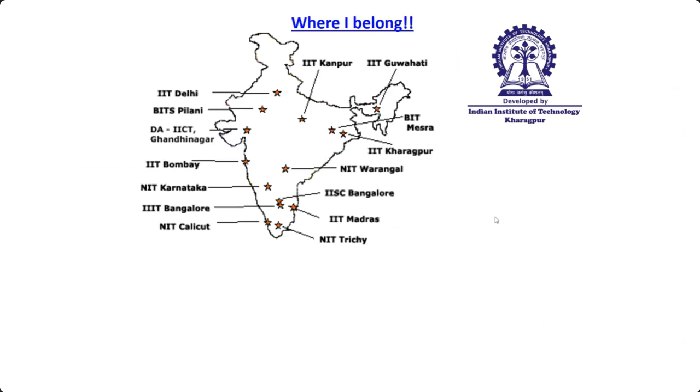Okay, so at the first point, let me just show where I belong. I come from this IIT located at the eastern part of this country, and this is the first IIT for the entire IIT system, established in 1951 by our then Prime Minister, Pandit Jawaharlal Nehru. We have a strong history in the sense that our campus is actually located in a Hijli detention camp. So this was a jail, there is actually still a jail for the freedom fighters of the then dependent India.

And when it was a motto to create a university which can cater to the strength of the country, it has been developed here. We still have the main motto of our institute inscripted here as 'dedicated to the service of the nation.' We strongly believe in that aspect.

Let me just show you the group of students, my entire strength, who have added up to my knowledge base layer by layer. Of course this photo has been taken before the lockdown, so some of the faces have already passed out, and there are some new faces. So whatever I'm going to show today is because of their hard work.

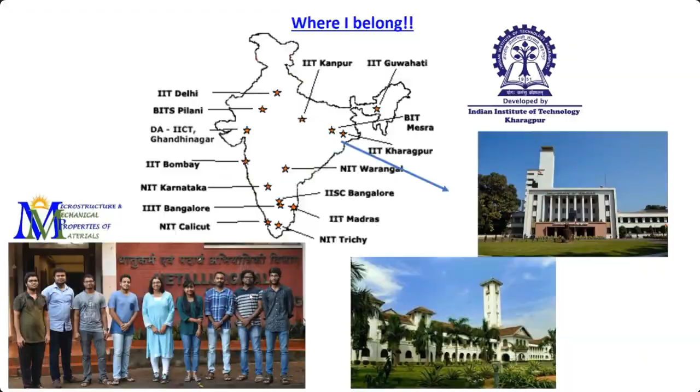The broader research activity is basically to correlate the microstructure and the mechanical properties of materials, and different kinds of materials. We work extensively on nickel-titanium based shape memory alloys that have wonderful properties, on titanium-based intermetallic alloys which are very capable for high temperature applications used in aerospace industries. There are several other kinds of titanium alloys, and of course anything in metallurgy will always stand on steel, so steel forms our main pillar.

So there are several categories of steel that we work on, super alloys as well, both conventionally processed as well as additively manufactured. We extensively study their mechanical properties at the macro scale, doing several kinds of fracture, fatigue, all different kinds of fatigue testing on this, and also at the micro and nano scale.

Okay, I'm getting a message that the connection is interrupted. Am I still audible?

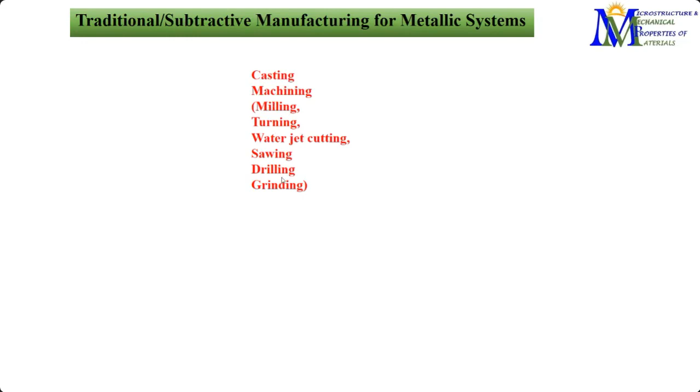When we metallurgists talk about any kind of process systems, we think of several kinds of processing operations on a component, which are inevitable, like casting and different kinds of machining. These are some of the ways by which we try to give the material, a block of material, a particular shape.

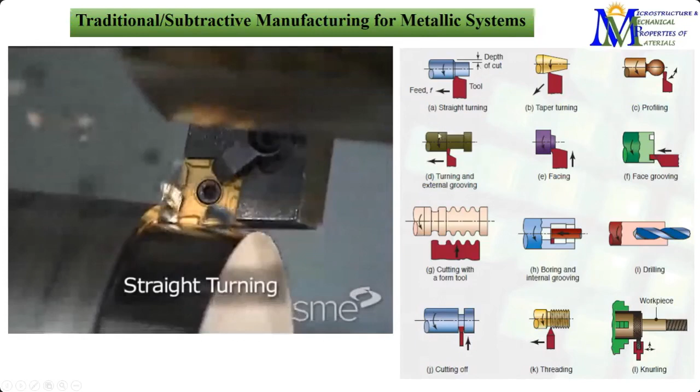We apply several kinds of machining operations like turning. Let me show a video - since there is no sound, I will explain it myself. This is a kind of straight turning where we apply the tool to turn it continuously so that we can give it a particular shape, and in the process you can see a lot of chips coming out.

So this is another way of turning being shown. Several kinds of operations include taper turning, where we can get a taper, something like this. Of course, there is a lot of mechanics behind each of these operations, and I'm sure you might be familiar with them.

What we can see here is that to get a nice shape for the purpose it is meant for, after casting the materials, we have to go through a severe amount of processing to give it the final shape and the required properties that it is meant to have.

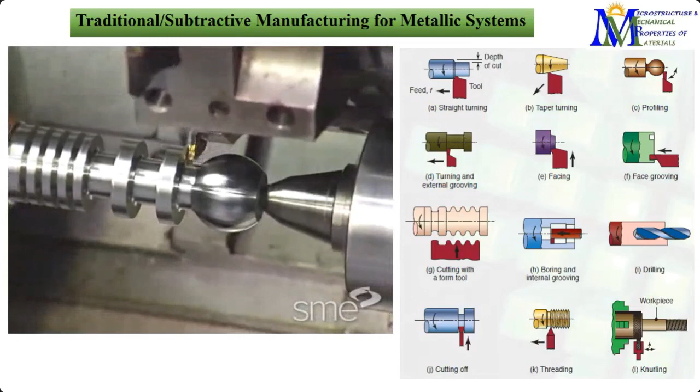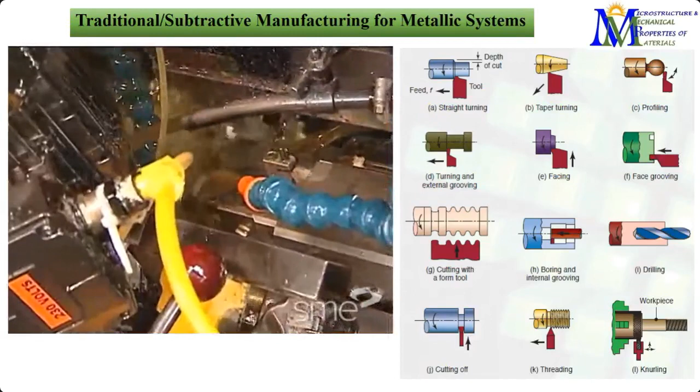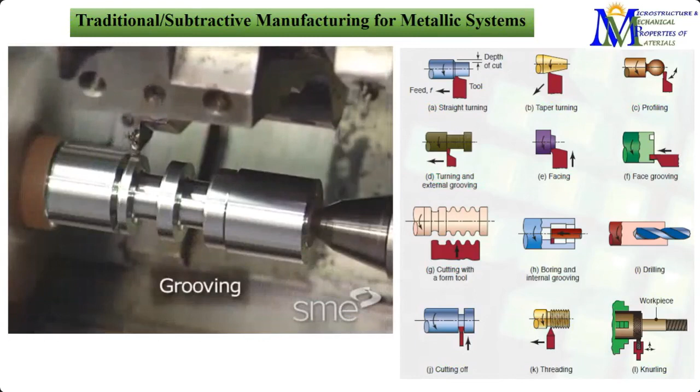So this is a kind of forming operation. And chamfering - this is necessary to give it a 45-degree inclination. And this is grooving; often we need to do internal grooving as well. Threading - you can see the threads very distinctly here.

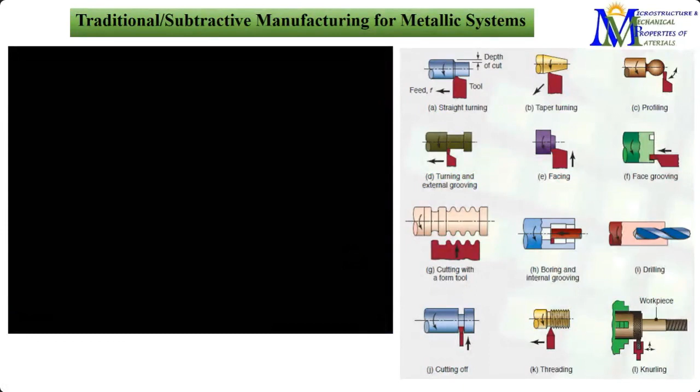So these are the different operations that we need to do. But when we think of that, this is associated with a large number of problems, in the sense that we always thrive for better material, and by better we mean it should have higher strength, hardness, etc.

Higher the strength of the material, the tool should have even more hardness compared to that. And when we are continuously machining, there is a huge amount of tool wear. So there is a lot of studies going on to make the tool material strong enough so that we can work with components of certain materials like super alloys, which are much stronger, and we need such kinds of tools. Wearing of the tool is a huge issue.

There is, of course, undesirable chip formation - you see chips everywhere. We need to do some after-processing to get rid of this chip, and basically this is just a wastage of material. We have to waste more than 50% of the material just to give it the final shape, which is often very challenging considering the entire cost of the component.

So this is how conventional subtractive manufacturing works - we have a block of material to which we give the particular shape that we want, and in turn, as I said, there is a huge amount of material that is just wasted.

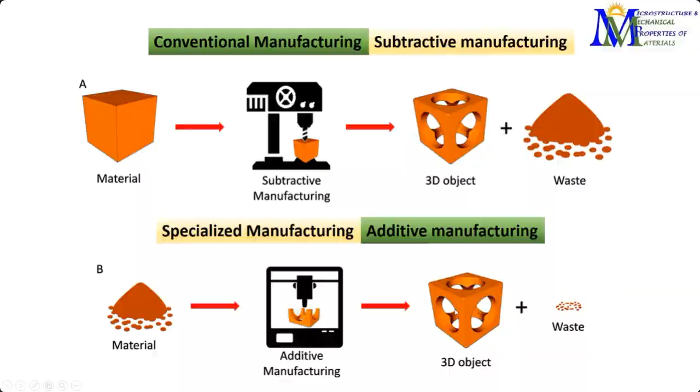Basically, subtractive manufacturing is a top-down approach - we start with the bigger piece and gradually move on to the shape we require based on several kinds of operations. On the other hand, additive manufacturing starts with the powder, so it's a bottom-up approach - we start from the lower level and keep adding layer by layer to finally reach the shape we require.

Okay, my screen has once again gone and I'm getting a message that there is an interruption. Ma'am, it is okay. Okay, fine. Thank you.

So if we give the brief differences between additive manufacturing and subtractive manufacturing: as the name itself suggests, additive goes on by adding layer by layer, whereas subtractive deals with removing from it. We can get complex and customized shapes as necessary. It is said that additive manufacturing can do this in a single step, whereas subtractive manufacturing has limited ability; we are often not able to fabricate very complex shapes just by machining at different levels.

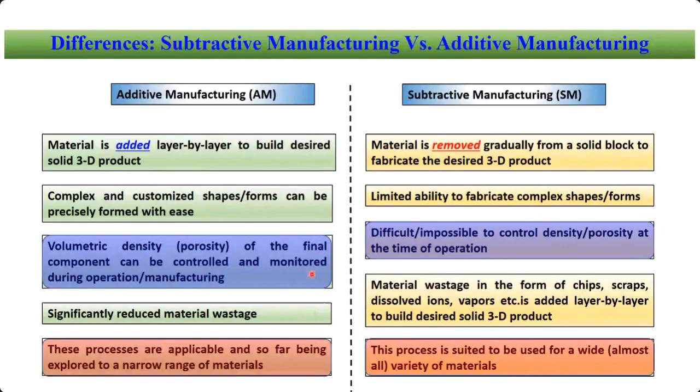Now, moving to additive manufacturing itself, we have already established that additive manufacturing is the future. There are a lot of opportunities and several things that need to be explored. We also need to understand the challenges. Of course there are several advantages, but what are typically the challenges that need to be overcome in additive manufacturing? First, we can get a complicated shape, but it is very challenging to have fine accuracy in every nook and corner.

Often the surface finish is an issue, and we need to ensure a suitable surface finish. Now, thinking from a metallurgist's or mechanic's point of view, for a particular application, say aerospace, we are very much concerned about properties like fatigue, and how the component will behave under cyclic loading. If we are not able to ensure proper surface finish, that will be detrimental for the fatigue performance of the material. So we can have a complicated shape and all the benefits of additive manufacturing, but we can still end up with early failure if we don't ensure this particular aspect.

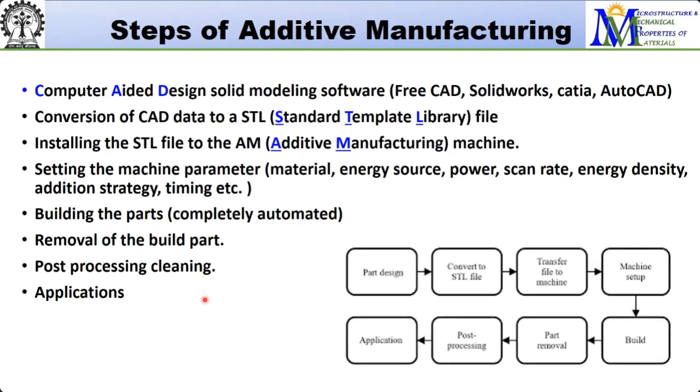Okay, so these are just the flowchart for that. And there are different kinds of additive manufacturing processes. According to the ASTM F42, there are seven different ways.

Out of those, the ones mostly suitable for metallic systems are powder bed fusion or powder feed technology. Amongst powder bed, there are different kinds: electron beam melting, selective laser sintering, selective laser melting, and direct metal laser sintering. Whereas in powder feed, we have LENS, laser engineered net shaping, direct metal deposition, or laser metal deposition. These are the principal operations that we use.

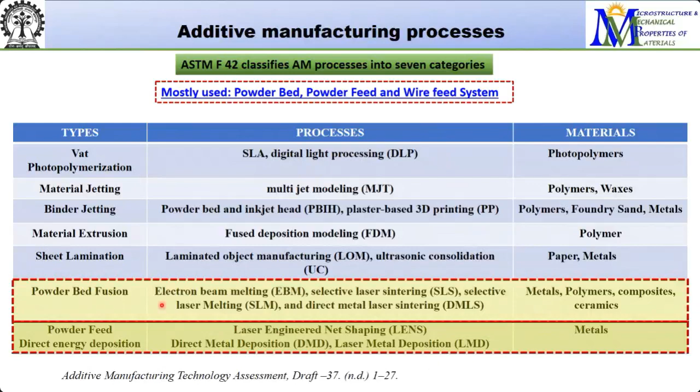So basically we have different kinds of heat sources: laser beam, electron beam, plasma arc, gas metal arc. All different things are used as energy sources, and out of those, laser beam is the one mostly used. Electron beam is also very much used, but laser beam is the most widely used.

As I said, the major two types of additive manufacturing techniques mostly used for metal additive manufacturing are powder bed, where we have a nice bed of powder and the source of energy travels as per the design to get the product. And in direct energy deposition, often called powder feed, we have the energy source and the powder stream acting simultaneously as per the design, and then we get the final product.

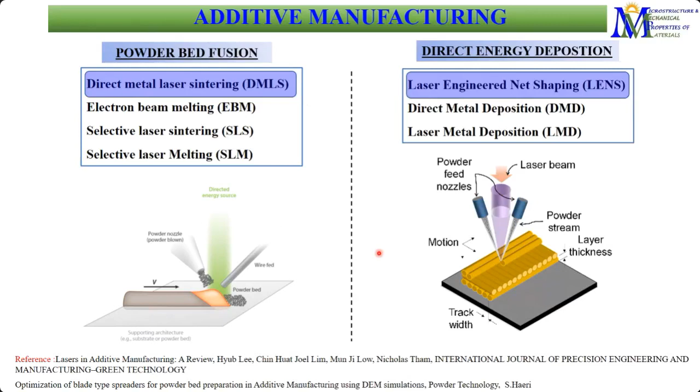So these are the different techniques for powder bed as well as powder feed. I would like to show two different things, one from each category, to show how these are being done. Once again, I'm having a video here.

This is for the direct metal laser sintering.

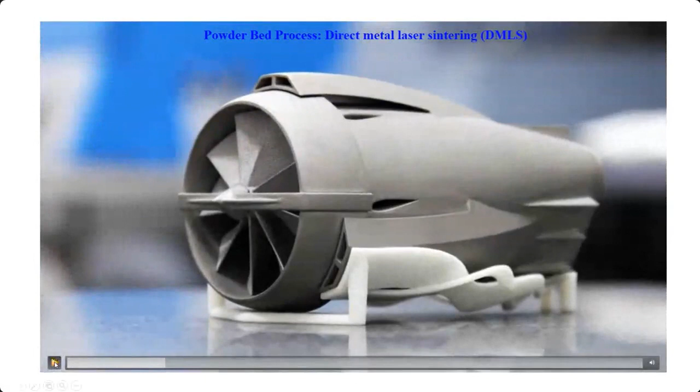So once again, I confirmed with Professor Dinakaran that the sound is not audible, right? It is still not, yes ma'am, sound is not audible, ma'am. Sound is not audible. Okay, yes, so I will just go ahead with this.

This is how it is being made, and the video explains it elaborately.

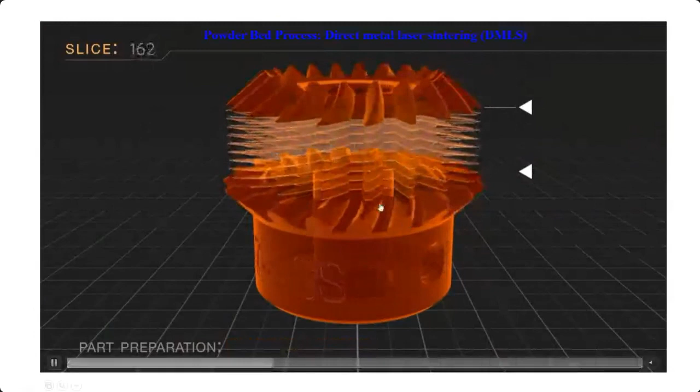So such a giant structure is being made. This is a kind of stainless steel that they have used for aerospace application. These are all the layers being made as per the design.

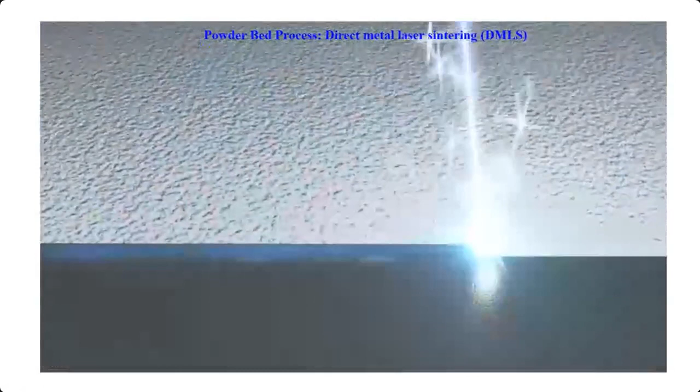So this is the powder bed that is being formed. Again, a powder bed, and then there is a laser as per the direction, as per the shape. And this is how it's going, the thickness.

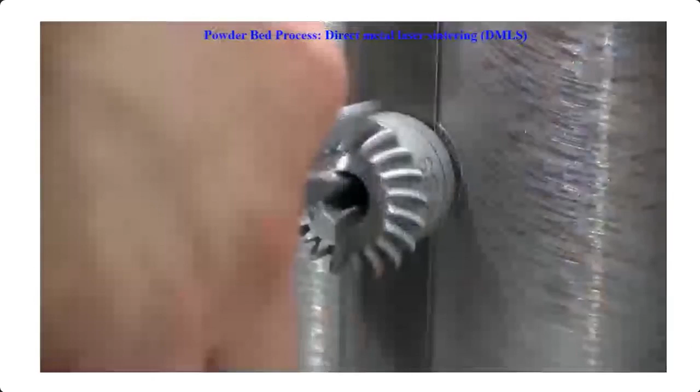Now removing it from the base plate is also sometimes very much challenging. So all the support structure and everything needs to be removed and needs to be polished to have a smooth surface finish.

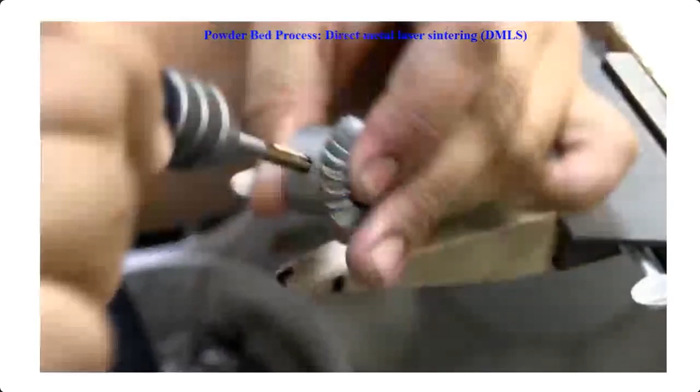So often DMLS is used for aerospace, for surgical implants, for different kinds of tools. That is where we are going to use this.

And this is the laser engineered net shaping system, which is a powder feed technique. So it's not a powder bed anymore; we apply the energy source as well as the powder simultaneously. This is just a system from Optomec shown here. So there are the dual powder feeders.

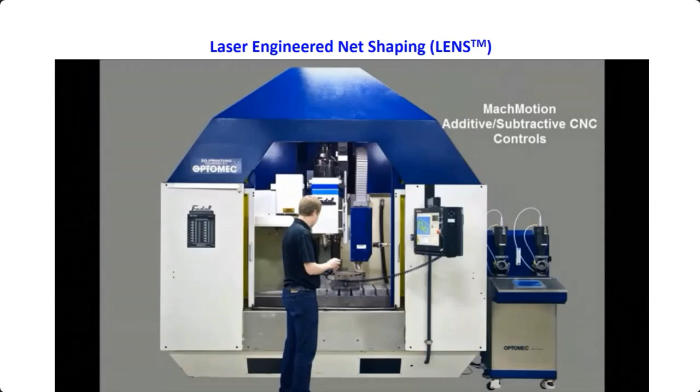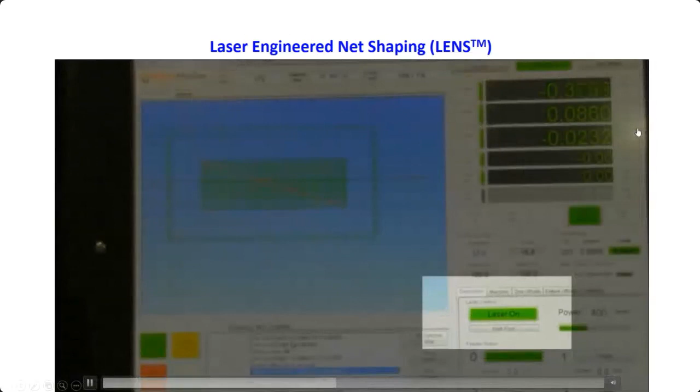So this is repairing a key. This is another very good application of additive manufacturing, and LENS is often used there. If some part is broken, we do not need to replace that—we can simply repair it.

You can see the powder and the laser coming from the same place, doing this according to the scanning. In the next step, it has been reoriented to 90 degrees relative to the previous layer, so that finally we get as uniform a structure as possible. Often this angle between different layers is varied—it's not always restricted to 90 degrees.

Coming to the metallic systems which are mostly additively manufactured, we've seen there are several metallic systems highly explored in additive manufacturing. The primary being stainless steel, and then aluminum, titanium, cobalt chrome, nickel superalloys, and some precious metals also, used across various fields of application.

Aerospace and medical form the major part where additively manufactured materials are already in use, partly because aerospace and medical fields are always exploring new things. They need to ensure that whatever application criteria and properties are required are met, and figure out how best to do that.

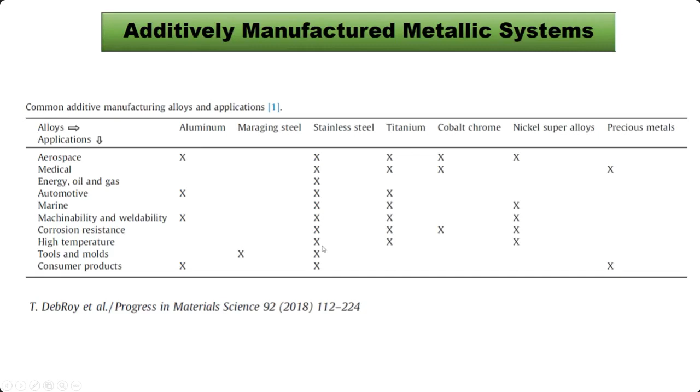From a metallurgist's perspective of this additive manufacturing technology, we finally narrow things down to two particular questions. First, when we do additive manufacturing, how does that modify the microstructure of the component? We deal with the microstructure, going into the internal part to see how it gets altered. And then our next question is how does that affect the properties of the component? These two are inherently related—if we have control over the microstructure, we'll be able to control the properties also.

So based on the industry using these additively manufactured components and the particular application area, we would like to control the microstructure and in turn achieve the properties of our requirement.

Coming back to the microstructure—as I've mentioned, one of the biggest things for a metallurgist to notice is that additive manufacturing creates non-uniformity in the microstructure. This is particularly related to the heat distribution during the additive manufacturing process itself. Whatever heat source we're using leads to a variation, a gradient, and different kinds of radiation, conduction, and so on happening, which leads to formation of a gradient in the structure—there is a temperature distribution.

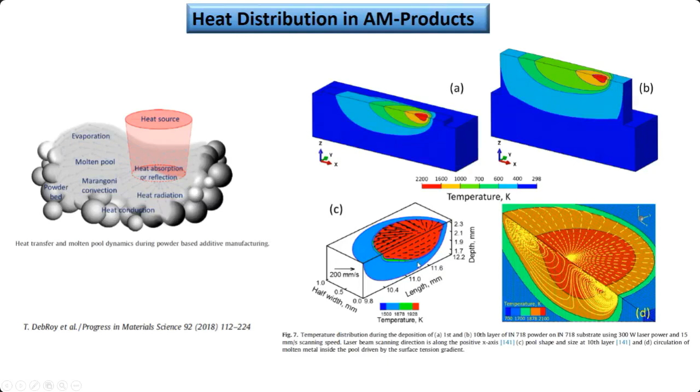And this leads to a very strong distribution of temperature, and the temperature gradient will also lead to variation in the melt pool. As you can see, the shape and temperature level, everything for the melt pool has changed layer by layer. So these are subsequent layers shown here, and we can see that at every layer this melt pool geometry is completely different.

Now, these grains are actually formed of crystal lattices. There are different ways by which the atoms can be arranged, and we can have different kinds of lattices, and these lattices finally organize up to a certain extent, that is a grain, and it forms a boundary. So that's an interface between two different grains where the lattices are oriented along different directions, and all this very much affects the properties of the material.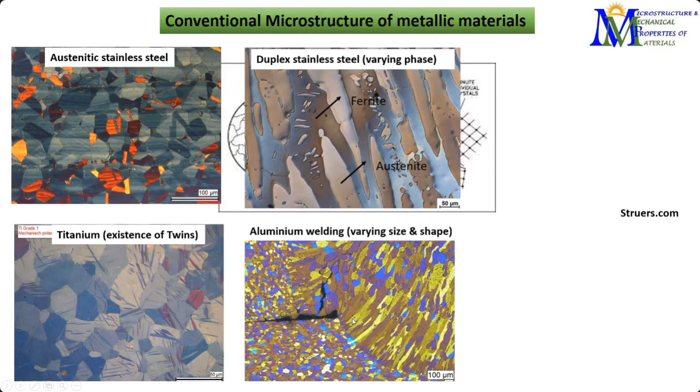So this is typical of what we get from conventional systems. Now when it comes to additive manufacturing, whatever this kind of structure is, we expect it to be uniform all throughout. So the entire component, if we take a cross section and look into the microscope, will show us grains like this at any point, be it top, bottom, or anywhere.

But in case of an additively manufactured part, we have a completely different scenario. There is a difference in the melt pool and heat distribution, as I said, and that leads to variation in the microstructure within the same structure itself. So you can see this 3D view, and we can actually figure out the layers, each of these layers, from the structure itself.

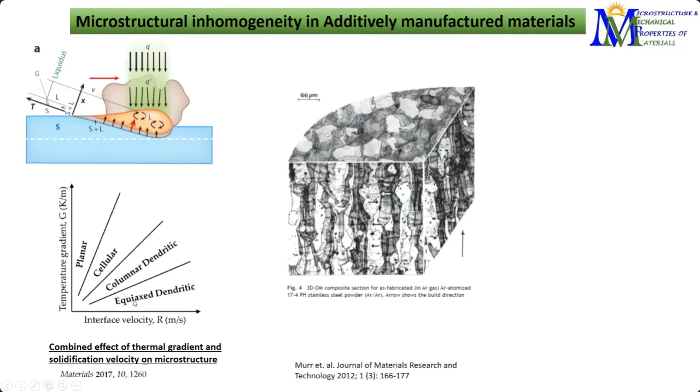We have equiaxed structure, dendritic structure. First you can see big dendritic phases there, and then we have equiaxed, columnar, all different kinds of morphologies. What we eventually get in the additively manufactured component is a modification in the microstructural size as well as the morphology. We may have, even with equiaxed grains, fine equiaxed and coarse equiaxed, and then columnar grains versus equiaxed grains.

We may have different kinds of phases altogether, and these differences are not only with respect to conventionally manufactured materials, but at one zone, at the top layer versus the bottom layer, we may have differences in the microstructural size, morphology, phases, as well as composition. So although we start with the same powder, we end up having different kinds of composition at different zones. It's possible, and the extent of this variation is dictated by the various processing parameters imposed during the additive manufacturing process itself.

So while these are leading to modification, we, the engineers and particularly the researchers, are very much excited to note that if there is some kind of modification, we are never satisfied with just the term modification.

We want to control that - that's how the term engineering is being used. So we want to engineer that out of our own requirement, out of our own wish, so that we can have control on the properties, the final performance of the material.

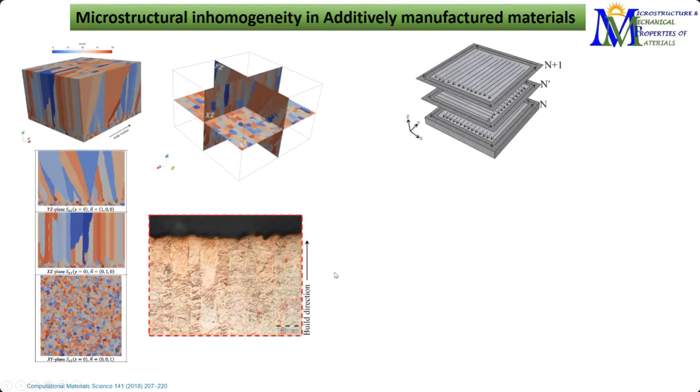This is what is being shown: if we have a 3D component like this, and we cut it at several sections, we will have a completely different microstructural lookout. This is the XY plane versus YZ plane - you can see there is a complete difference in the microstructure, and at every layer this is being different. This is the build direction, and we can figure out the layers and how these are being made.

If we do this analysis at different sections, at different angles, we will see that there is a complete variation in the microstructure, and that means there will be complete anisotropy in the properties. The properties at these different layers will also be different. Although subtle, there can be huge differences between the top and the bottom versus the cross section and the perpendicular, and so on.

Finally, we do not want our component to fail by being stronger in one direction and weaker at the other, right? So we try to homogenize it as much as possible.

These are the typical features that we would see in additively manufactured things. The first thing we notice is this kind of fish scaling, the hatch spacing and all that - I will discuss a little bit more about that now.

But other than that, there are some defects that are formed - some balling effect, some unmelted part that can retain there, and there could be some hot tear between the layers, and this could lead to weaken the structure and lead to some failure.

Since one of my focuses is also to study the mechanical properties, particularly fatigue, such kind of cracks in between all these balls here are very bad news for the fatigue behavior of the material.

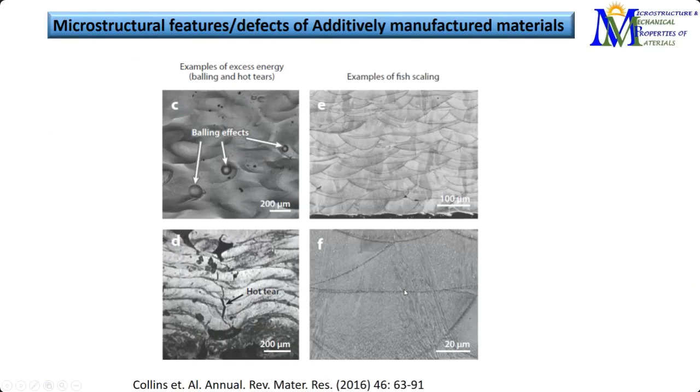So then I'm going to show you how these microstructure-properties are usually correlated in case of additively manufactured metallic systems, and I will do that with four typical systems: one which is non-ferrous but very widely used, titanium alloy; then a functional material, a shape memory alloy, nickel titanium, which has very niche applications, both in aerospace, space, as well as biomedical industries. And of course, when it comes to metals, we are always biased towards stainless steel, and there are so many applications of stainless steel, so I have selected two different categories of stainless steel for today's presentation.

So let's move on with the microstructure-property correlations. Before going on to these four different materials, I'd like to give you a brief understanding of how microstructure and properties are correlated. This guy here is actually the structure - structure refers to the microstructure, and microstructure means the grain structure that I just explained. There are various other features of microstructure which are of importance, such as the lattice structure, colony structure, etc. So how these crystal lattices are being oriented and distributed dictates the structure, and it finally controls the properties. We do several kinds of characterizations to get the properties.

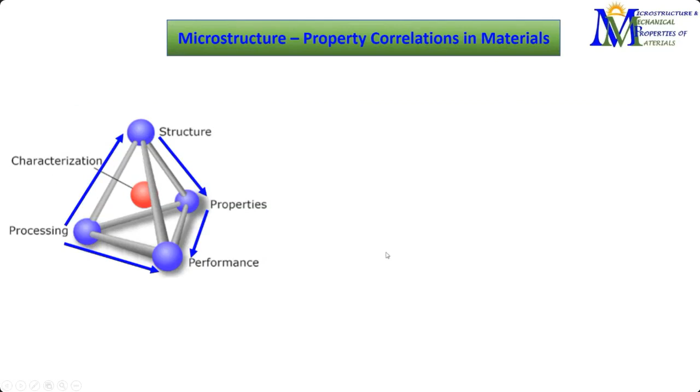This structure is finally being controlled by the processing - so this actually starts from here. We process something, be it conventionally processed, as cast and then machined, or be it additive manufacturing. Based on the processing, we end up having different kinds of microstructure, we characterize it, and based on the different kinds of microstructure, we get different kinds of properties, which finally dictate the performance of the component. So this is how it leads to processing, structure, properties, and performance - and this is just an example of the different techniques and what this can alter.

We have seen that in case of additive manufacturing, it has an influence on almost everything, all the aspects of the structure, the microstructure, including the phases, the grain sizes, morphologies, the densification, porosity, segregation, etc. And these are leading to variation in the important properties which are of relevance, such as strength, ductility, toughness, fatigue. Hot cracking resistance is often related to the segregation of different phases, etc., which is finally dictating the performance. So moving on to the most commonly used titanium alloy, it's titanium 6 aluminum 4 vanadium.

That's a two-phase titanium alloy. It has two important phases, alpha and beta. Alpha is a comparatively low temperature phase, which at high temperature converts to a beta phase having a completely different crystal structure. Alpha has an HCP structure and beta has a BCC structure.

When we look into the additively manufactured structure, this is how the macrostructure looks like. You can see these bands here very clearly, and this signifies the grains; the prior beta grains also can be seen here, quite big. And if we investigate the microstructure at different levels, at different layers starting from B to G, you will see distinct changes in the microstructure. This is very much fascinating.

And of course this has a huge role to play when we are talking about strength and hardness, because the microstructural size is somehow inversely related to the strength of the material. I'm sure you might be familiar with the Hall-Petch relation, which says that the yield strength of the material is inversely related to the square root of the grain size or lathe size or any kind of microstructural size. So as we have finer and finer microstructure, we have higher and higher hardness or strength.

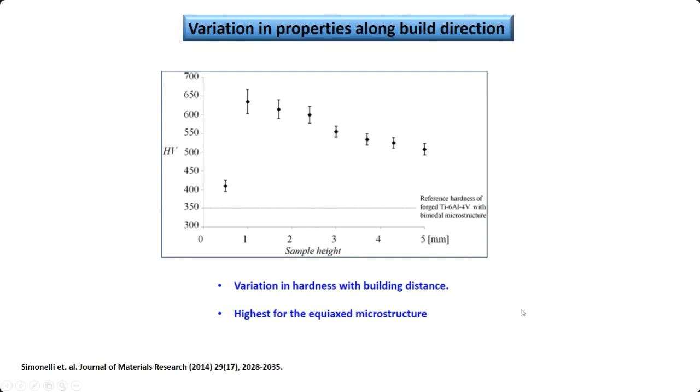Of course there is a variation in the microstructure size and morphology, and that leads to a variation in the hardness level also. The highest hardness is noted for the equiaxed structure, so we should always strive for that.

Now there is another work here which shows that even if we use additive manufacturing, if we use two different kinds of additive manufacturing technique—one is LENS, laser engineered net shaping, versus selective laser melting—starting with the same powder, pure titanium, commercially pure titanium, and just apply two different additive manufacturing techniques, we are going to see completely different microstructure at the same level.

So if we look at this at low magnification, we see that LENS is producing much finer microstructure. That is what is apparent, though it's not very clear here.

Whereas if we look into the higher magnification microstructure, we'll see that in fact SLM leads to formation of the martensitic structure. This fine acicular alpha prime is nothing but the martensitic structure, and martensite structures have a lot of other benefits. It is usually much harder compared to the normal alpha phase.

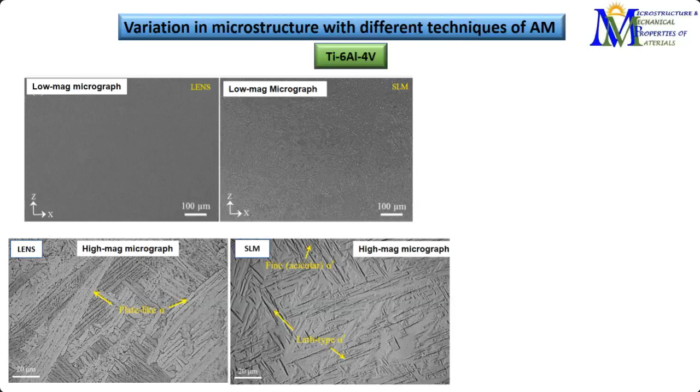Now, when we do that, we are not always happy with this term that SLM gives us better structure. Again, the question is why and how.

Okay, to answer that, we need to understand that we can also vary for each of this process, be it SLM or be it LENS, the processing parameters—the power, the scan speed, as well as the powder flow rate—to end up having completely different kinds of microstructure.

So you see here, using the same power of 200 watts and the same scan speed of 10 millimeter per second, just with a difference in the powder flow rate—higher, double in this case—we end up with a coarser microstructure. In comparison, here we actually reduce the power and increase the scan speed, but with the same flow rate as before, and we still end up with a coarser microstructure.

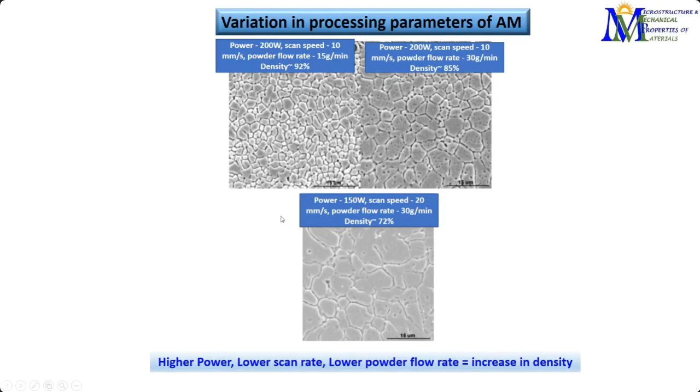So we now have a way to figure out which kind of microstructure we need to attain the required properties. It's not always mandatory that we strive for higher and higher hardness, because higher hardness also comes with lower ductility. So we have to optimize the processing parameters to end up with improved properties.

And while doing that, there has been a study to find out the relative density. This is another very important part, because if we are not producing a dense component, and if we end up having porosities, voids, or some unmelted zones there, that could lead to failure in several ways.

What we can see here is that in case of LENS processed specimens, we can achieve maximum density, more than 99%, at an energy of around 146 joules per millimeter cube. Whereas in case of SLM, because of the differences in technique, we achieve the same amount of relative density but with a much lesser energy density.

This is LENS versus SLM, the defects that are being formed here—you can see there is a lack of fusion that leads to crack generation, such big cracks more than 100 micrometers in size, and these are completely bad news for any application that requires cyclic loading, or even for normal tensile purposes. If we end up having something like this, that component is of no use.

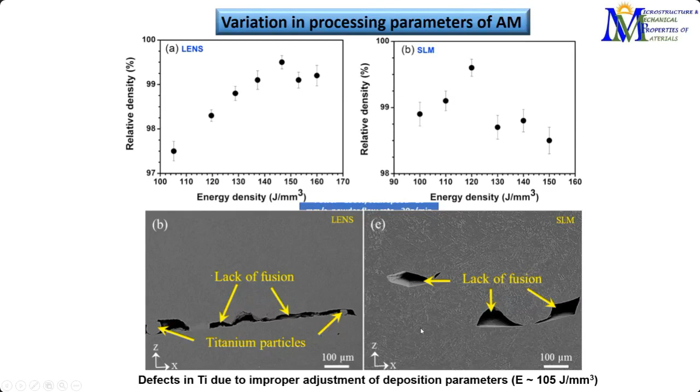So we have to ensure that we use the right energy density, changing the processing parameters accordingly. Whereas if we use this energy density—146 for the case of LENS versus 120 for the case of SLM—we end up with a completely compact structure with no such defects. So we can see that SLM requires lower energy, so it should be more cost effective.

And also we can change the phases. We may form martensite. That will be good news if we are talking about the hardness of the material.

So there have been some extensive reviews done on different kinds of processing technologies used—conventional heat treatment versus different kinds of additive manufacturing such as LENS, DMLS, EBM, DMD (direct metal deposition), all these things—and we have a very nice summary of how the properties vary: the ultimate tensile strength, yield strength, and elongation. These are the three primary properties we look for, other than fatigue.

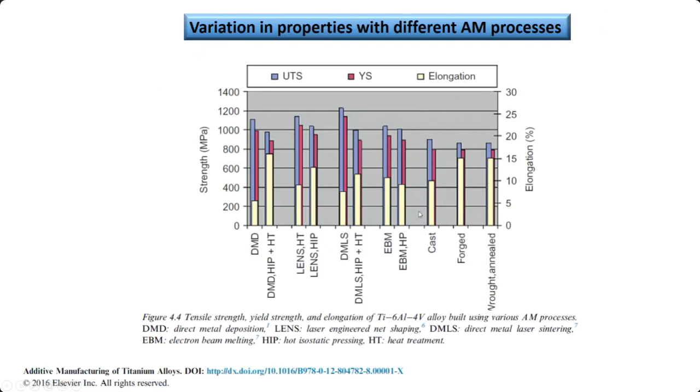And these are varying extensively if we are talking about cast versus additively manufactured, as well as amongst the different additive manufacturing techniques themselves. So based on the requirement, we can figure out which technique is suitable for a particular application, and we can go ahead with that.

So what we can take away from this part is that there are huge differences in the microstructure and the properties if we are looking along the build direction, from bottom to top. There is a variation in the microstructural size, morphology, as well as phases, and that can lead to differences in properties, as well as in different AM processes—be it SLM versus LENS or any other processing technique versus the conventional one—which influences the microstructure and properties in a big way.

And we have to understand that we need to correlate that very methodically and systematically to use it for any particular application.

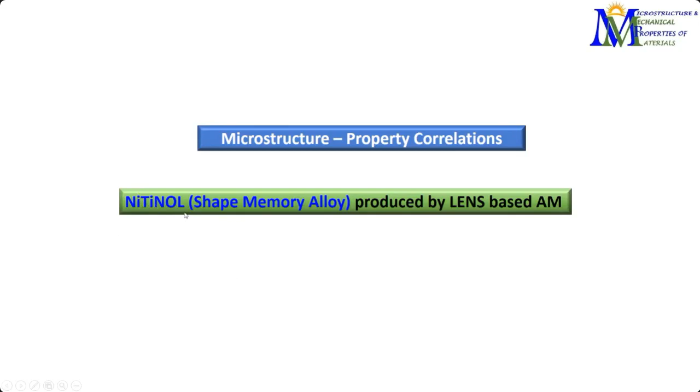Before going on to the details of the additively manufactured material, we have worked on something on the LENS processed NiTiNOL. Before going into the details for that, I would like to give a brief introduction of this system, because it is very unique, and just to ensure all of you are familiar with what we are talking about.

So this material also has two different phases. One is called austenite and another is martensite. It's different, completely different from the martensite that we have just seen in case of titanium, or what we regularly see in case of steel.

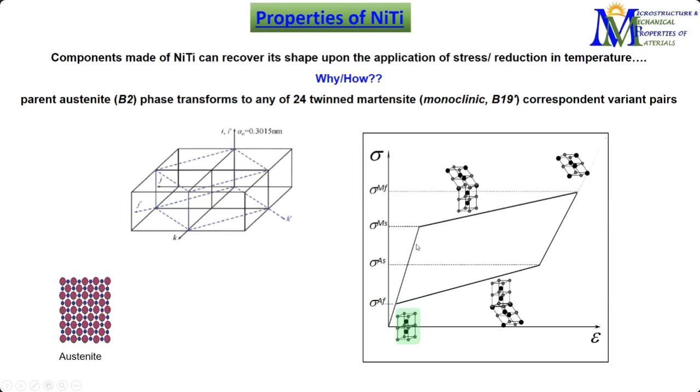This has just two different crystal structures that can be achieved if we apply stress or temperature. If we have the initial structure as austenite, which has a cubic structure, and if we apply stress to it, it is going to transform to martensite.

Simply applying stress can lead to change into martensite, which has a monoclinic structure. Afterwards, if you keep adding stress, there is a huge amount of strain generated, but only a very minor amount of stress is required, and it basically does a detwinning of the martensite. Initially it forms a twinned martensite and it gets stretched out, forming detwinned martensite as we keep adding stress, and we get a large amount of strain.

Now the beauty is that if we unload, simply remove the load, we can go back to the initial austenite phase, and this entire amount of strain can be completely recovered. That is why it is called shape memory.

So whatever shape change is happening looks like a typical stress strain curve, but this part can actually be completely recovered. Up to this point, if we do not have this unloading section, it will look like a typical stress strain curve, but what it actually does is completely recover its shape back.

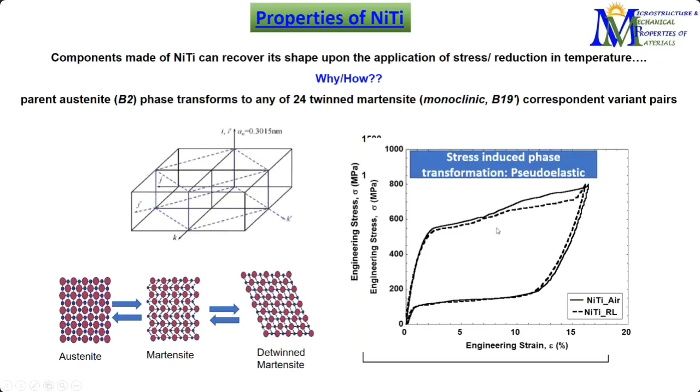Now this has various applications. This is used even for the wheels of lunar vehicles, the lunar rover. The wheels are made of this nickel titanium, which can simply go ahead on any kind of rugged surface, because it does not have any plastic deformation.

All this phase transformation that we achieve with stress can also be achieved by changing the temperature. At one particular temperature it changes from austenite to martensite, and if we reheat it, we can get back to austenite. So this is a completely reversible hysteresis that can form.

So as I said, it is used in very niche applications like lunar vehicles, but most commonly this material is biocompatible, so it is also used for various medical applications and implants.

One very important application of nickel titanium is in cardiovascular stents, used to remove clots in our arteries when we have a cardiac arrest because of cholesterol problems.

You can see an artery where blood flows and there is a clot here. If we use a stent made of nickel titanium, because of temperature and stress it can expand, have a different shape, and expand the blood vessels, remove the clot, and the blood can easily flow through. So that's a very nice application of nickel titanium, and it is being largely used.

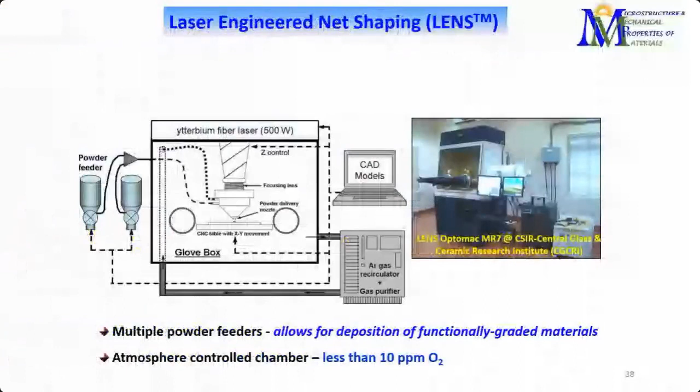Now, when we talk about medical applications, we often need very complicated shapes and miniaturization. These are hardly a millimeter in size, and it is even used as sensors in MEMS, with micron sized devices and implants that need to be made. Often we have to take advantage of additive manufacturing to make that.

For this particular one, we used a LENS system to produce the nickel titanium component, and in the process we varied the processing parameters. We used 3 different laser energy densities, ranging from 27 to 70 joules per millimeter square, varying the laser power, scanning speed, diameter, etc., ending up with 3 different laser energy densities, although we started with the same nickel titanium pre-alloyed powder.

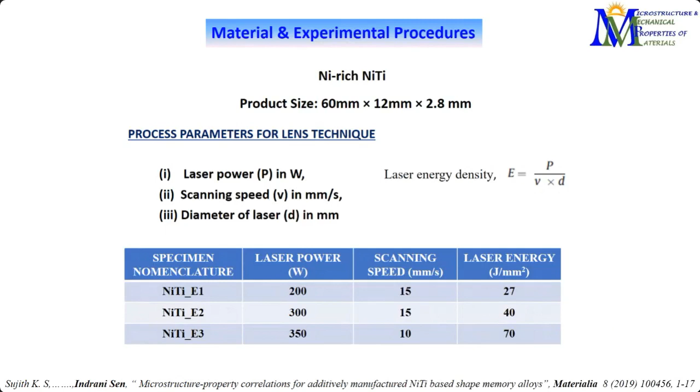Now, interestingly, what we get looks the same across the 3 components produced from the 3 processing energy densities. We have done a thorough microstructural characterization as a first step, from various locations - top, middle, bottom, cross section, parallel to the build direction, perpendicular to the build direction, interior of the build direction - at every location.

For a particular location, we have named these E1, E2, E3, where E1 is made with the lowest energy and E3 with the highest energy. We can see there is a complete difference in the microstructure. This is the typical optical microstructure in the tint etched condition, showing how we can generate this colorful microstructure optically.

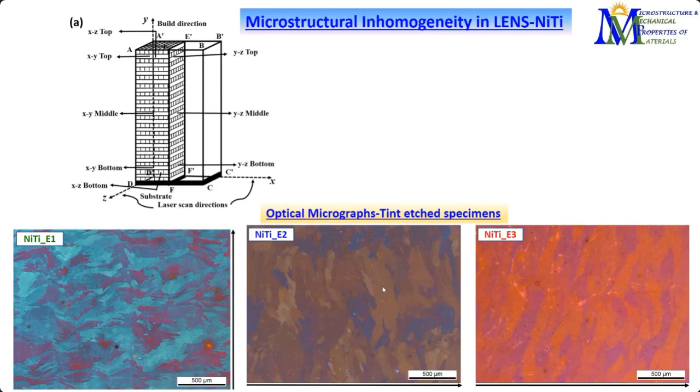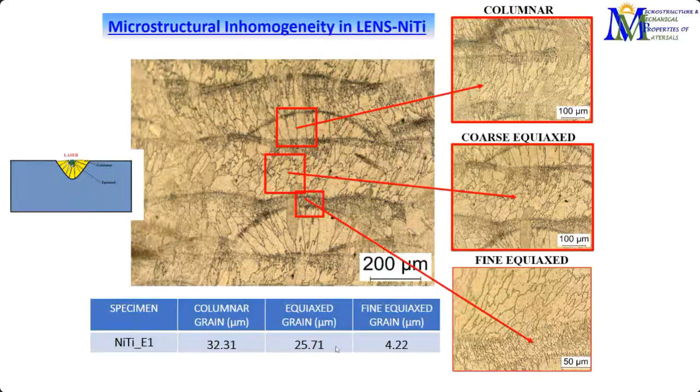Looking at this carefully, we have seen different morphologies forming: coarse equiaxed structures, columnar structures, and very fine equiaxed structures. The fine equiaxed structures have a grain size of 4 to 5 micrometers, whereas the coarse equiaxed ones are 5 times higher than that. Obviously this will have a huge influence on the properties too.

This is how the hatch structures are formed, and we have characterized the hatch spacing and layer thickness, which vary distinctly for the 3 different energy densities we used. Most interestingly, the sample prepared with the highest energy density has shown some precipitates forming. These are Ti-rich precipitates, and this will certainly have a huge role to play in the properties of the material. We'll look into that shortly.

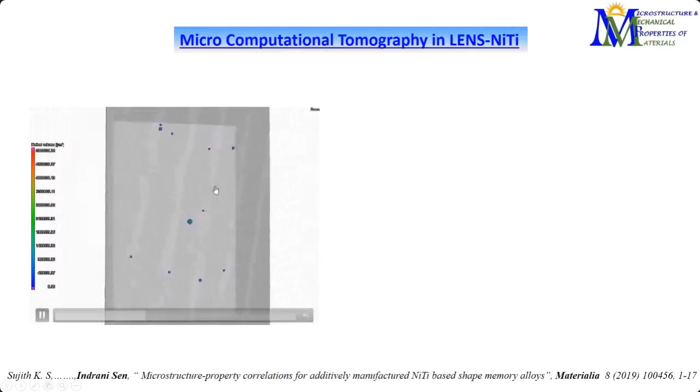Another interesting thing is the porosity. As I said, porosity is something we can control, and this video shows that we analyzed it through micro computational tomography to see how the porosities developed throughout the component. This is for one particular alloy system made with the highest energy density, but comparing the three, we see that the one prepared with the lowest energy density has a lot more porosities. Considering our applications, we can figure out whether these porosities will be beneficial and what processing parameters are necessary.

Porosities are very much bad news for fatigue applications, where there is cyclic loading. For example, in stents there is also cyclic loading—our blood gets periodically pumped, like our heart periodically pumps. So there is continuous cyclic loading, and any kind of porosities or defects for such applications are bad news.

On the other hand, for some other implants like bone implants, porosity is often desired. Biomedical applications often require porosities of certain percentages, and for that additive manufacturing is of great help, because we can control the porosities, the structures, and even their positions according to our need. For this particular study, as we increase the laser density, the compaction is much better and we end up having less and less porosity.

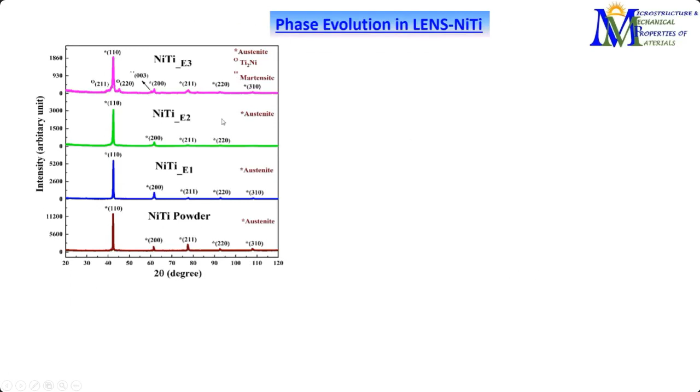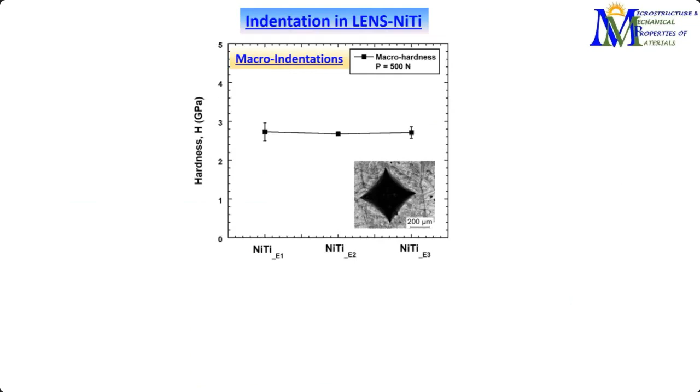The first thing we did was macro indentation, applying a very high load of 500 Newtons, and we could not see any difference in the hardness—very happy about that, since although we changed the processing parameters significantly, there was no such effect on hardness behavior. But with micro and nano indentation, things are different. Particularly in nano indentation, we saw a huge change in hardness, reflected by the change in the phases present and the local structures of the grains.

Okay, so this is what we have seen, that the presence of martensite and the precipitates enhance the hardness and elastic modulus of the alloy, which is produced with the highest energy density. So far people would have been happy that if we are increasing the energy density, we end up having lesser porosity, and we will have higher hardness.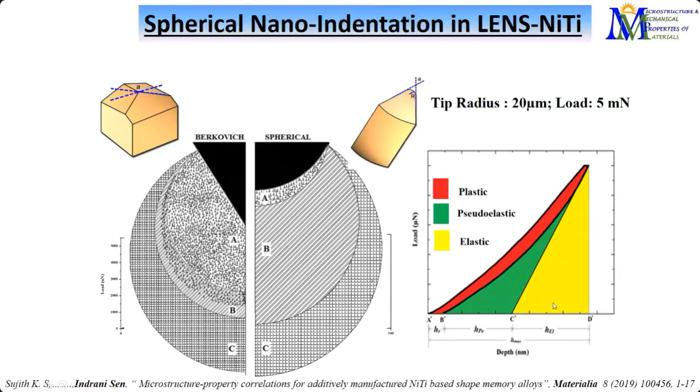That leads to the recoverability or the pseudoelasticity of the system. Now, what we have seen to our surprise is that the one prepared with a moderate amount of energy, the green one, shows the most amount of recoverability, whereas the red one, prepared with the highest amount of energy density, although it shows higher strength, it also shows a very high amount of plasticity, which means that its recoverability or shape memory capability is much lesser.

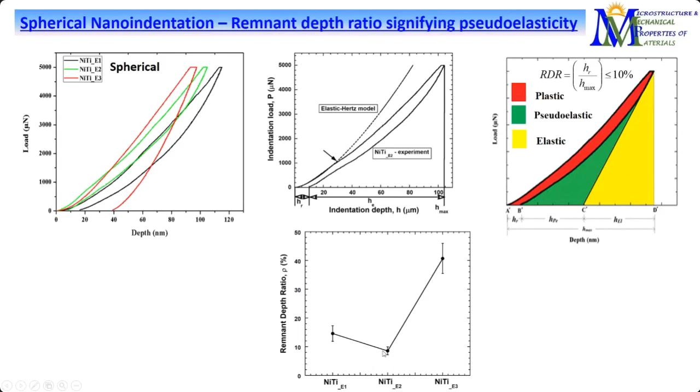Now we require nickel titanium for applications dependent on its strain recoverability or shape recoverability, right? More than the strength, this is the critical parameter we are concerned of. So obviously this study shows that if we use a particular amount of energy, a moderate amount, lesser energy density while preparing, then only will we be able to recover the maximum amount of strain or load, or shape basically.

So this is what has been figured out, and we have found a way to draw the nano indentation stress-strain curve also. We have also done bulk scale testing to figure this out, and you can see that the one prepared with a moderate amount of energy gives us the nicest plateau and maximum ductility and so on. This has also been correlated with digital image correlation.

While tensile testing, we have figured out how the deformation is happening with respect to time. You can see here that as we are applying the strain, the color coding is changing, signifying the amount of strain being applied, with loading and unloading, and then again loading. We could figure out that the three distinctly different components produced by different energy densities have different properties based on that.

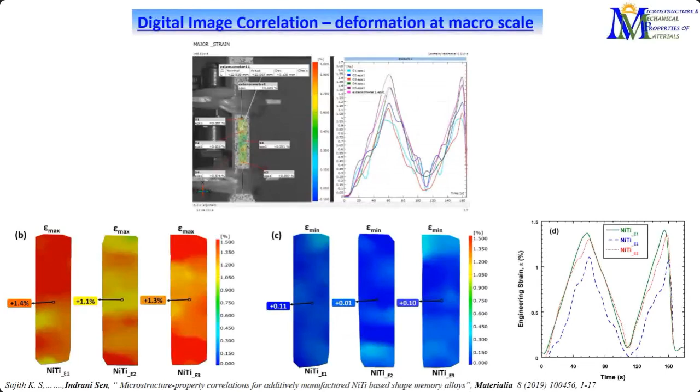If we simply do the hardness testing, we will not be able to figure that out, whereas we can find out from their tensile behavior the pseudoelastic nature of this material. So the bottom line is we require the optimized, lesser energy density. Instead of low or high, we require a particular optimized value to have a completely pseudoelastic behavior along with more or less ideal microstructure and phase.

Now, moving back to the next category of material, steel. Since we talked about nickel titanium so far, let's start with steel, which is also a biomedical grade. Most of the things presently are being made of 316L steel. Biomedical implants like orthodontic arches, braces, etc. that we use are mostly made of this 316L steel. This has several importance in the sense that it has high corrosion resistance, and it has the required amount of strength for such kind of application.

It has biocompatibility as well, durability, etc., and is being used for several things like surgical tools also. So not only as implants but also used for various surgical tools as well as implants like hip joints, screws, many such things, as well as in regular application in aerospace.

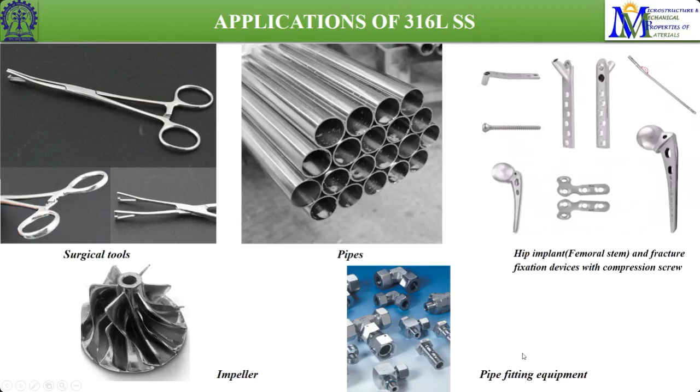Considering the wide applicability of this material, additive manufacturing is also being tried on it. We have an LMD manufactured block, laser manufactured block, which we have characterized at different sections and cross sections, parallel and perpendicular to the build direction, and evaluated the microstructures at the top, middle and bottom at different sections, seeing the differences in microstructure.

We created a montage by stitching hundreds of images, and you can see that the layered structure is very much evident. If we look closely, we can see the hatch spacing and layer thickness very clearly. We have characterized and quantified that, and we have seen that in each layer the microstructure is changing distinctly, even at not-so-high magnification optical microstructure.

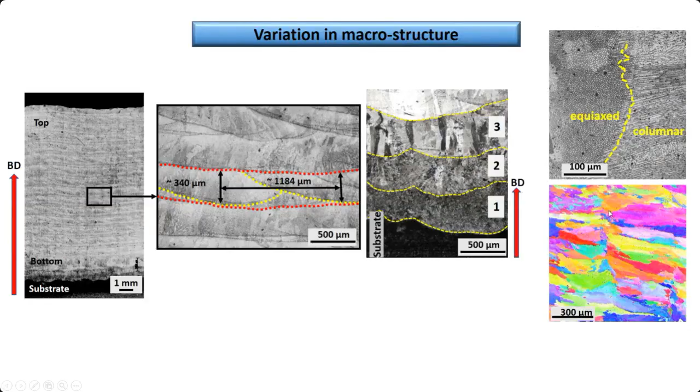This leads to different kinds of microstructures, in the sense that it has equiaxed structure, it has columnar structure, and the interface often plays an influential role in dictating the properties of the materials as well. The layered structure is also evident, and the interface is very much evident from the EBSD structure itself.

So what we did in this case is, given such variation in the microstructure, to get rid of that we have solutionized them. We manufactured the component by additive manufacturing, and then used the conventional heat treatment procedure to modify and homogenize the microstructure. We did the XRD to make sure there is no further formation of any phases, but the microstructure is getting equiaxed now.

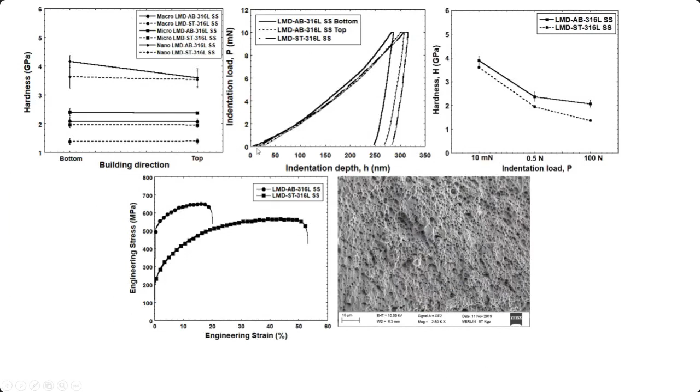Instead of a variation in the microstructure as columnar, equiaxed, coarse and fine equiaxed, we have a homogenized microstructure of equiaxed grains all throughout, with no variation in phase formation. So we simply solutionized it, and then did a detailed study on the hardness variation at the micro, macro and nano hardness level, as well as tensile testing.

Interestingly, it has been seen that this is the as-built structure. These circular points here are the as-built tensile strength, and what we can see is, although the ultimate tensile strength or yield strength is higher in this case, if we use a solutionized additively manufactured material, there is a huge rise in ductility. It has more than 50% strain to failure, which leads to higher toughness of the material.

So if we require an application that mostly thrives on higher improved toughness and improved ductility, we should definitely do some conventional heat treatment to the additively manufactured part so that we can achieve these properties easily, although it will still have a higher yield strength compared to conventionally manufactured materials.

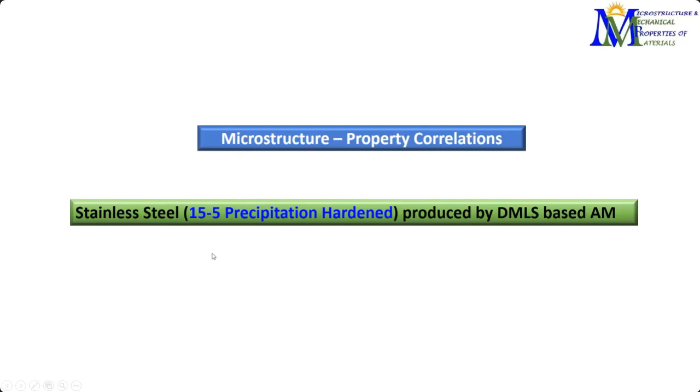That is what we have figured out, and based on our requirement we can simply do this. In a similar way, we have also studied the properties of 15-5 precipitation hardened steel. This is a kind of steel which can be hardened further if we allow it to precipitate out.

This is being prepared by DMLS technique, direct metal laser sintering, and we prepared a key kind of structure with this. We figured out that the typical hatch structures and typical additive manufacturing structures are already there, and once again the differences in microstructure are quite apparent. We have columnar, cellular structures, as well as equiaxed structures, varying with the build direction at every point.

What we did in this case is that, apart from the as-built one, we also heat treated it using the conventional aging treatment used for this precipitation hardened alloy, because unless we do this kind of aging treatment, we are not able to get the full benefit of the precipitation hardening.

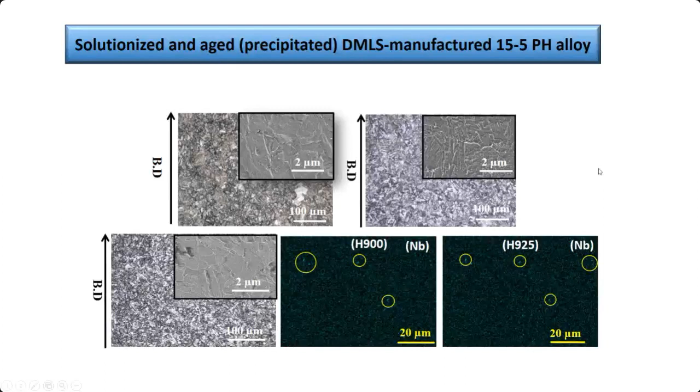So we tried to implement the same kind of heat treatment used for conventional testing, and we could see the precipitates come out at such temperature changes. We figured out what is the optimum kind of heat treatment needed for this additively manufactured material. If we want to use this precipitation hardened steel, we should use this optimized heat treatment so that we can have the best of all properties.

And we did the XRD studies for all the structures: the as-built structure, the solutionized one, as well as the aging treatment at two different temperatures and times.

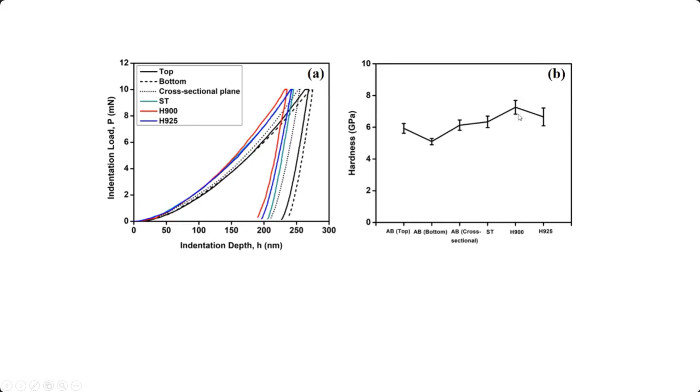This is the nano indentation studies that have been done for the top, bottom, and cross-sectional planes, as well as solutionized and aged samples at 2 different conditions. We see how the hardness varies, and we get the best results when heat treating the additively manufactured sample at a particular temperature and time combination.

The takeaway here is that overall, in metallic systems, there is a huge difference in the microstructure and the properties. There's anisotropy along the build direction, and conventional heat treatment procedures in stainless steel components can help homogenize the microstructure as well as achieve isotropic and improved performance. That was our goal — to make a component with even improved properties compared to the conventionally manufactured one, and with a little more effort along with additive manufacturing, we end up achieving that.

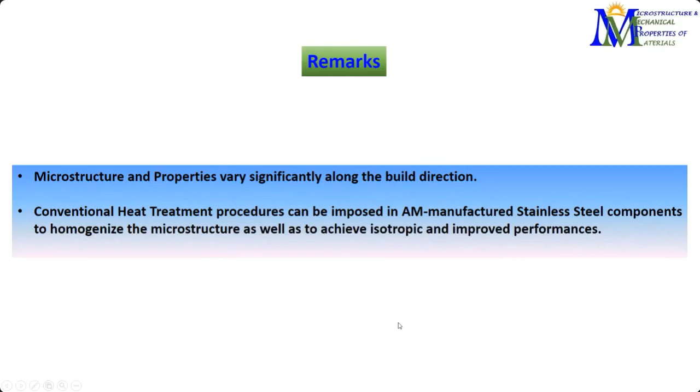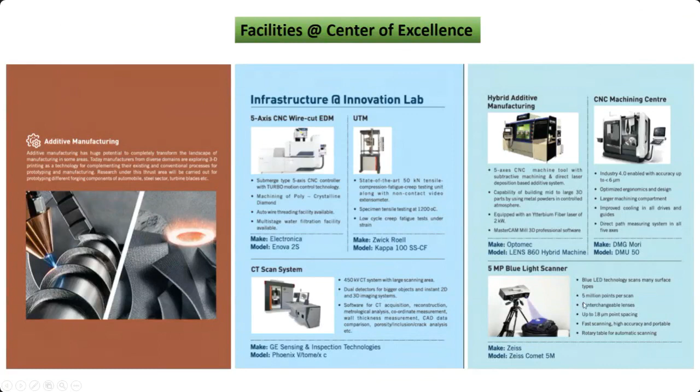This is the Center of Excellence built at IIT Kharagpur, the Center of Excellence in Advanced Manufacturing Technology, where we have several facilities including additive manufacturing, as well as several other characterization facilities. I'm partly involved in this center, and we have several kinds of experimental facilities and characterizing tools there.

Of course, this would not have been possible without my students — there are many of them — as well as my collaborators all throughout the world who have supplied us materials. In India, there are the Central Glass and Ceramic Research Institute, the Bhabha Atomic Research Center, the Defense Metallurgical Research Lab, as well as collaborators in the USA and Germany who are helping me get this collaborative work ongoing.